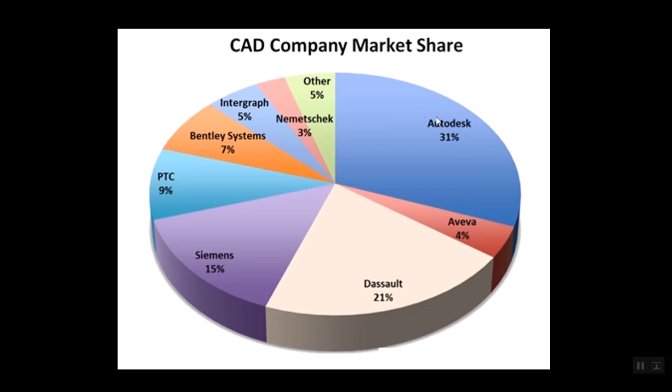Autodesk is a huge chunk of the market share for engineering graphics software. AutoCAD runs on PC, and there's even a Mac version. Just understand, if you're a Mac person, that the Mac version doesn't really look like the PC version, and it can be tricky switching from one to the other.

To buy a copy of AutoCAD so that you could use it for your business, it's about $4,000 to get started, and then about $1,000 a year to sustain that from year to year.

And if we wanted to save a little bit of money, it is a little bit cheaper to buy the LT, or the lite version of AutoCAD. Significantly cheaper. It just doesn't have all the cool stuff that the full version has.

AutoCAD is free for college students in industrial drawing courses. So what you'd want to do, if you do not have AutoCAD currently, you're going to want to go to

www.students.autodesk.com, and you're going to want to create a profile. We'll have some instruction on how to do that very soon so that you can get your free Autodesk software for AutoCAD.

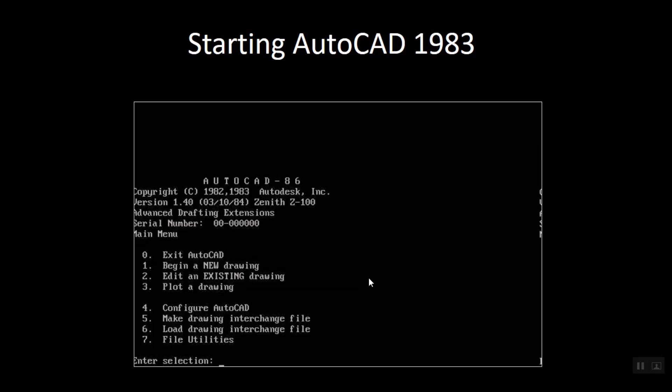In 1983, if you had started AutoCAD, it would have looked like this. It was a DOS-based program, which meant a lot of typing. It came on big floppy disks, about 20 of them, and then the interface was very plain.

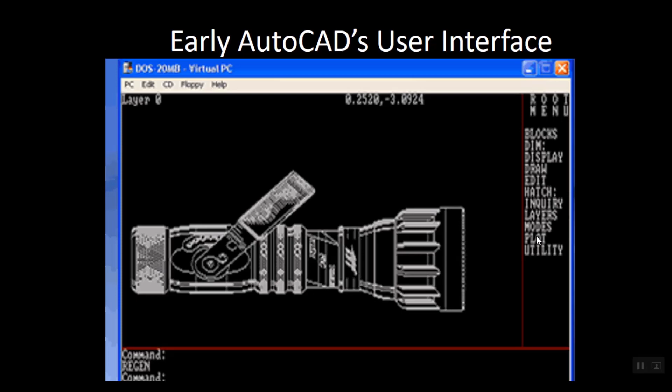We had some command line down the bottom. We have some tool tips on the side here. Our drawing window fills up most of the screen. This is the early interface.

In 1996, Windows added toolbars. Well, not in 1996, but by 1996, toolbars were pretty common in most programs. So there was a toolbar that had a bunch of similar tools grouped together. The problem with AutoCAD was there are so many tools in the program that if you opened up all the toolbars, there'd be no space left to draw.

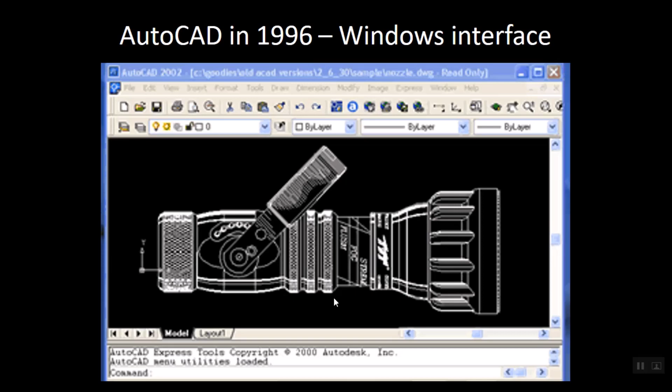So in 2011, Autodesk went along with a lot of the Microsoft products and switched to something called the ribbon, which instead of having 150 different toolbars, we have one place where all the tools are, and that one place, the ribbon, is arranged in a way that it's easy to get the tools you need. And the ribbon actually has got some intelligence built into it, so it only gives you the tools that you are going to use depending on the kind of task you're working on.

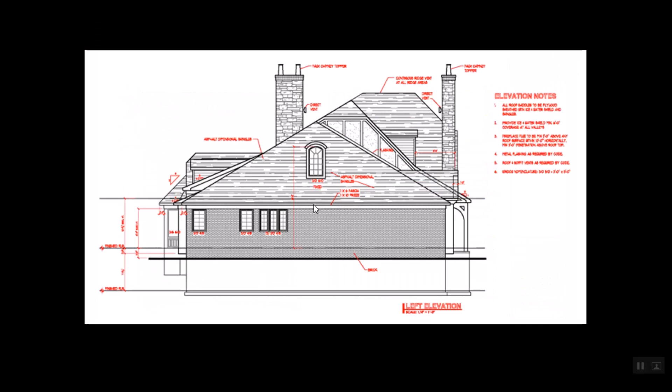So what can you draw in AutoCAD? Well, you can draw anything in AutoCAD, for mechanical design, civil engineering, surveying, architecture, aerospace, construction, 3D modeling, piping design, interior design, structural details, clothing, welding, electronics, sheet metal, you name it. You can make technical drawings for any field using AutoCAD software. And that's great. All of those areas need someone to make drawings before any fabrication, building, or construction can happen. And you have a chance to work in a wide variety of fields.

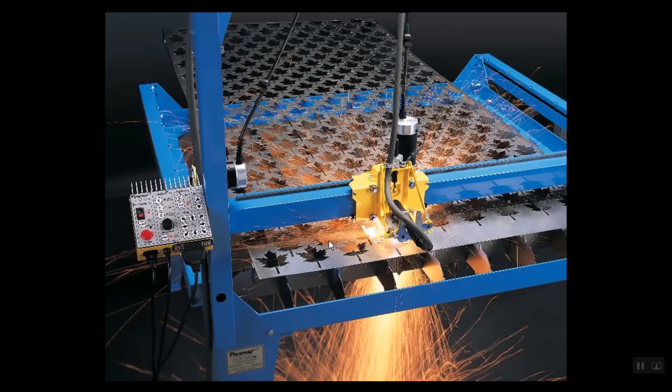Now, it's nice to be able to draw things in AutoCAD, but you can actually make things in AutoCAD. CAD files can be used to direct cutting tools like a plasma cutter. So instead of having to cut hundreds of individual little leaves perfect every time, we could use a CAD drawing, copy the leaf multiple times, and send that same drawing to a machine that will do the cutting for us.

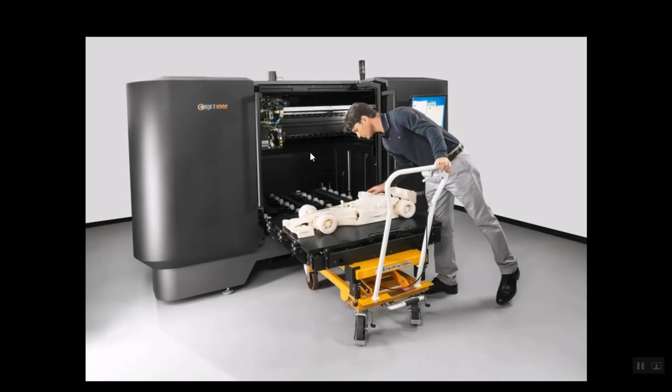Here is a very large 3D printer. Here's another example of some things that we can make with CAD software. We can make 3D models and then have them fabricated on a 3D printer.

CAD drawings, though, are different. CAD drawings are very special. So what we want to understand is there are two types of computer-generated graphics: raster graphics and vector graphics.

Raster graphics are made up of pixels, and you see this if you take a picture off the internet or a picture with your cell phone and you zoom in. You'll see a bunch of little squares, and each square has its own color assigned to it. When you're zoomed out, the picture looks beautiful, but when you zoom in, it pixelates, and you see that it's made of little squares of color.

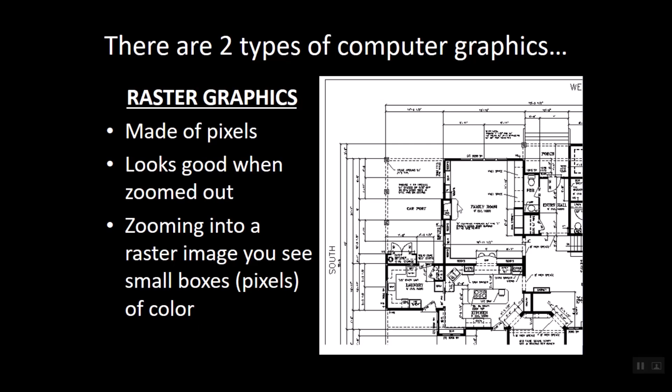On a drawing file, that would be disastrous, because if you're zooming in and out, well, it's going to get blurry. And when it gets copied, it's going to be unreadable and illegible and sloppy.

Vector graphics, though, are different. Vector graphics are not based on little squares of color. Vector graphics are based on vectors, which are mathematical expressions that define geometric elements. So, for example, a line isn't going to be a bunch of little black squares one after another in a row. A line is going to be a mathematical location, a coordinate, a Cartesian coordinate of a starting point, and then an ending point, and then a thickness and some mathematical properties applied to the line.

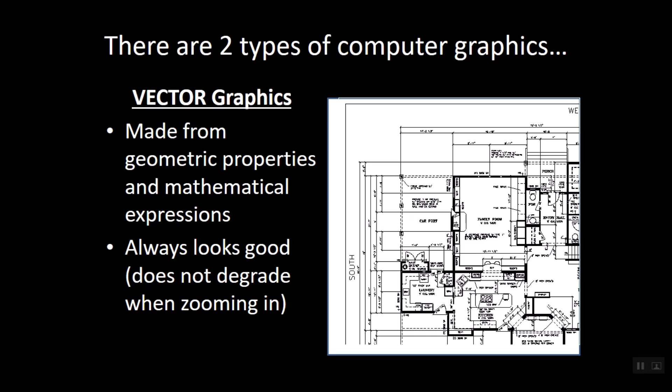And then what you see on the screen is actually AutoCAD doing the math to display these different geometric elements that make up the drawing. The nice thing about them is you can zoom in and zoom out, and they never get pixelated. They never get hard to read. They're clear and sharp, and they print out perfect every time.

So here are two types of computer graphics: raster graphics, maybe you've made something in MS Paint or Photoshop, and you'll see if you zoom way in, you'll see pixels. Vector graphics, AutoCAD makes vector graphics, Adobe Illustrator makes vector graphics. And the advantage is mathematical properties define the geometry, so it never degrades no matter what we zoom in or zoom out to.

Okay, so we want to get started. We're going to go look for the most recent installation of the Autodesk AutoCAD software on your desktop. And if you take a look, we're going to find something that looks like a big red A. So on my desktop, I have AutoCAD 2020 English installed. You're going to want to give that a double click, and it might take a minute or two for it to open up. It's going to create a profile for you.